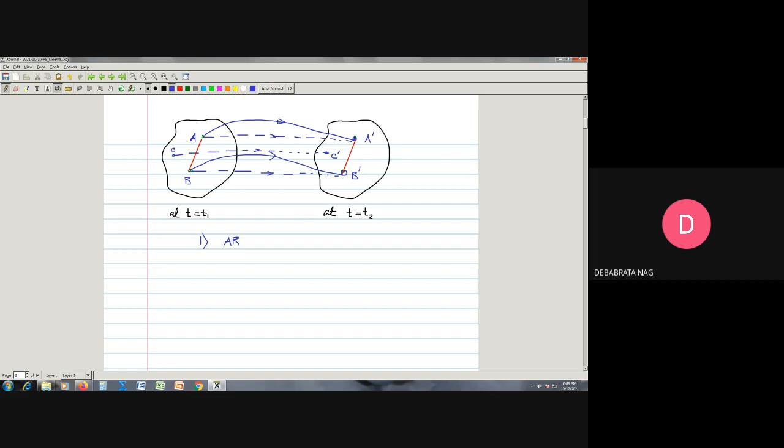So it means when it comes to this position at time t equal to t2, the distance between A and B is remaining the same. That is number one. In case of translational motion, what is further important is that since this body does not change its orientation, this line AB and this line A dash B dash are going to be parallel to each other. So first, we need to understand that the distance between the 2 points AB is going to be equal to the distance between the 2 points A dash and B dash at time t equal to t1 and at time t equal to t2.

That is number one. This is from the rigidity definition of the body. We can say this is the rigidity definition, that since the body is rigid, the distance between any 2 constituent particles is going to be constant. So that is number one.

And number two, since it is a case of translational motion, we find that the orientation of the body is unaltered. Since that orientation is unaltered, we note that AB is going to be parallel to A dash B dash.

So in this part, it is independent of the fact whether the rigid body is executing a curvilinear translational motion or a rectilinear translational motion. That means in case of translational motion, the distance between these 2 lines, if we join these 2 particles, any arbitrary particles defining the boundary of the rigid body, we will find them to be parallel to each other like this.

So we see that this is an illustration of the translational motion of a rigid body. Going back to our discussion, this is the simplest type of geometry to study its kinematics, and it is sufficient to follow the motion of a single point belonging to the body, as the motion of all other remaining points will be identical for all the particles in the body. Here, the orientation of the body also remains the same, as we have already illustrated. So that is what is termed as the translational motion of a rigid body.

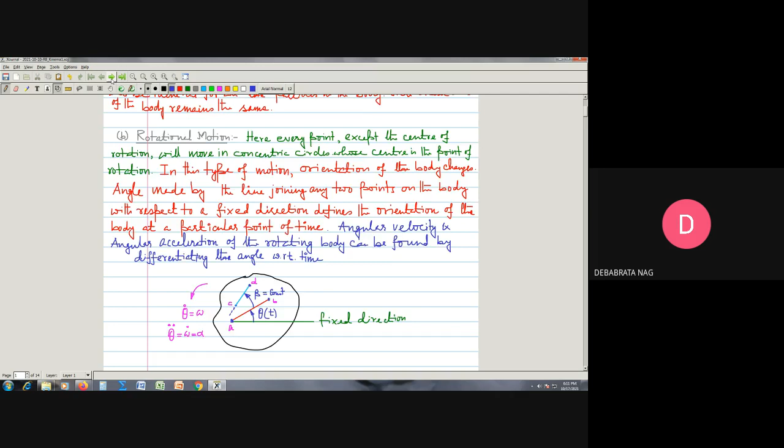So if we see in case of rotational motion, let us go to the illustration once again. Say for example, if we consider that same old rigid body here, let us consider this is the rigid body, and let us suppose that this point, suppose this is point A, is considered to be the center of rotation of this body. So what it means is that only this point is undergoing pure rotation. The rigid body is rotating with respect to point A, undergoing pure rotational motion with respect to point A. That defines that out of all the points, only this point A, considered to be the center of rotation, is the only point which is inertially fixed.

That means if we consider again, say this is the position at time t equal to t1, and after time t equal to t2, we have this body once again. Let us place it here like this, and then we slowly begin to rotate the body in this manner. This rotation may not be able to be displayed clearly with this diagram, so let me just take it this way. So this is the body, suppose.

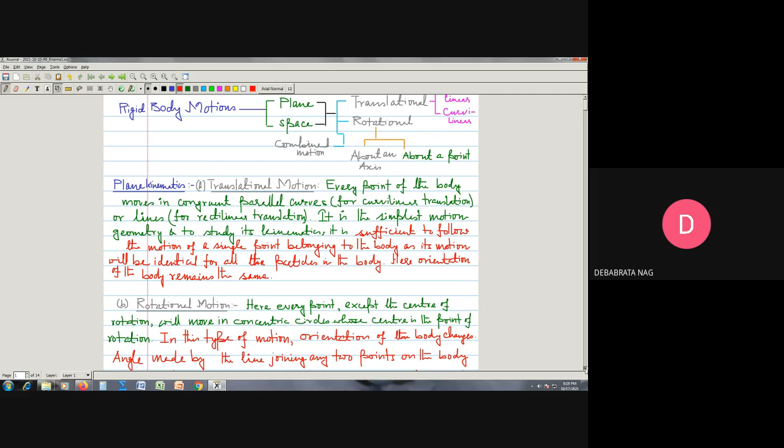So you see this angle will also be equal to theta. This is actually going to be the characteristic of rotation. So we can say the angle CAC dash is also going to be equal to theta, and it is going to be true for all other points on the body. This angle defines our actual amount of rotation, expressed in either degrees or radians. So we note that every point except the center of rotation will move in concentric circles whose center is the point of rotation.

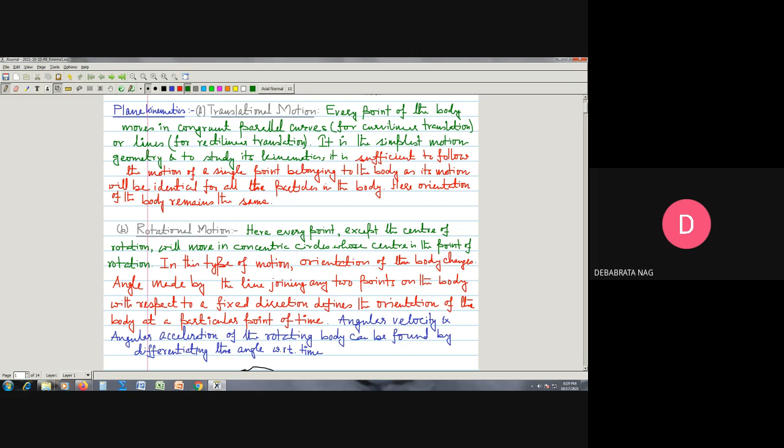In this type of motion, the orientation of the body changes, as we note that the line segment AB and the line segment AB dash are differently oriented in the plane. So we note that the orientation of the body is going to be changed, not preserved, unlike in translational motion. In rotational motion, the orientation of the body changes, and the angle made by the line joining any two points on the body with respect to a fixed direction defines the orientation of the body at a particular point in time.

Suppose this is a rigid body, and we take two points on the body, A and B. Through point A, if we consider a fixed direction, say this horizontal line taken as our reference, we can join the two points by a line segment and consider this angle as theta. This angle theta will define the orientation of the body at a particular point of time.

Why is that? Because after time t equal to t1, suppose this body is rotating with respect to point A. We will now show how such rotation can be depicted in the figure, so it is being rotated.

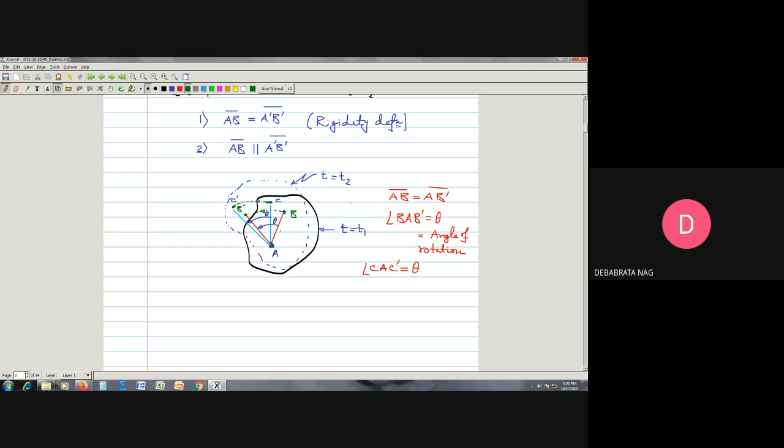Suppose this is our fixed line. The initial orientation of the entire rigid body can be defined by the angle which the line segment AB makes with this fixed direction. This direction does not change at any point during the course of motion.

If we call this angle phi, then phi defines the initial orientation of the body. If theta is the amount of rotation of that same line segment after time t equal to t2, then phi is the orientation of the body at time t equal to t1.

If theta is the amount of rotation, then at time t equal to t2 the new orientation of the body will be the angle made by the same line with that same fixed direction. This will be equal to the initial orientation plus the angle of rotation, if the two angles are in the same direction.

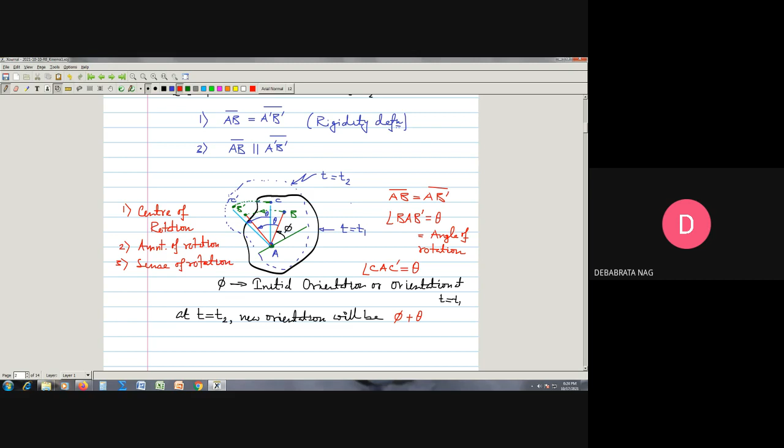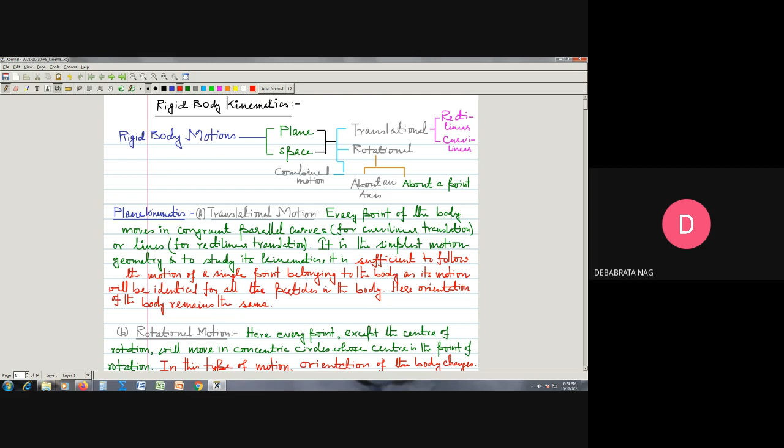When we say sense, in plane rotational geometry this can be clockwise or counterclockwise, anti-clockwise. We need to define all three things before studying the plane rotational motion of a rigid body. All these motions are pure, meaning there is no other component other than the rotation of the body.

Now consider another two particles, C and D. Here angle theta is defining our orientation. Taking the same fixed line, suppose the angle between line segment AB and CD is beta. From the definition of rigidity of the body, the angle between these two different segments is going to be unaltered, because it is a rigid body, this angle between two different points on the body remains unchanged.

Consider this angle as beta, which is constant. As far as the line segment AB is concerned, its orientation can be considered as a function of time, written as theta of t. Considering angle beta, which is also constant, the angle made by line segment CD with the fixed direction will be theta of t plus beta.

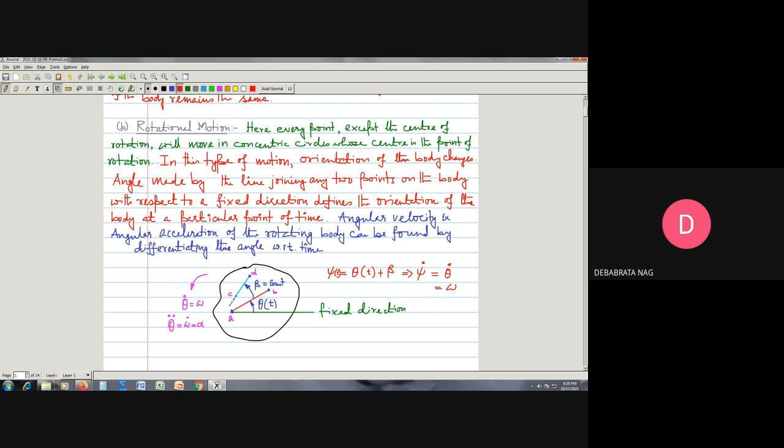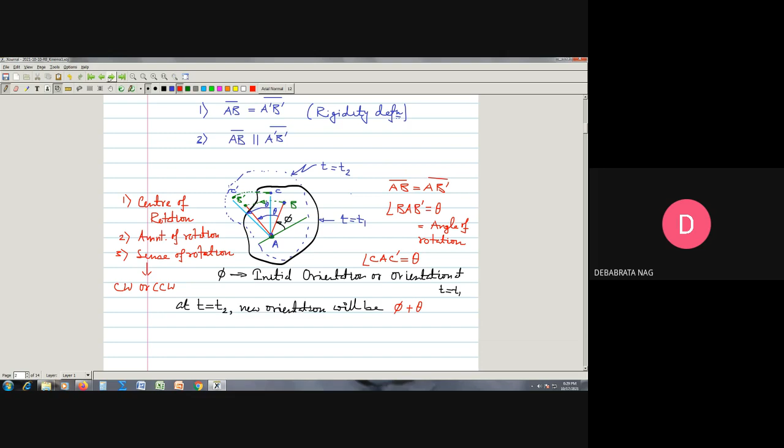The rotation is taking place about point A, the center of rotation, which is the first thing we need to define. With this center of rotation comes the concept of the axis of rotation. The axis of rotation is an imaginary straight line passing through point A and perpendicular to the plane of the body.

If we imagine a hypothetical line coming out from or going into the plane of the screen through point A, that line is considered the axis of rotation. In case of plane rotational motion, this type of rotation is termed fixed axis rotation.

We call this rotational motion fixed axis rotation because during the course of the motion, this axis, always passing through point A and remaining perpendicular to the plane of the body, does not change its own orientation. If it points vertical, it remains vertical throughout, always along a fixed direction. That's why this plane rotation is termed fixed axis rotation.

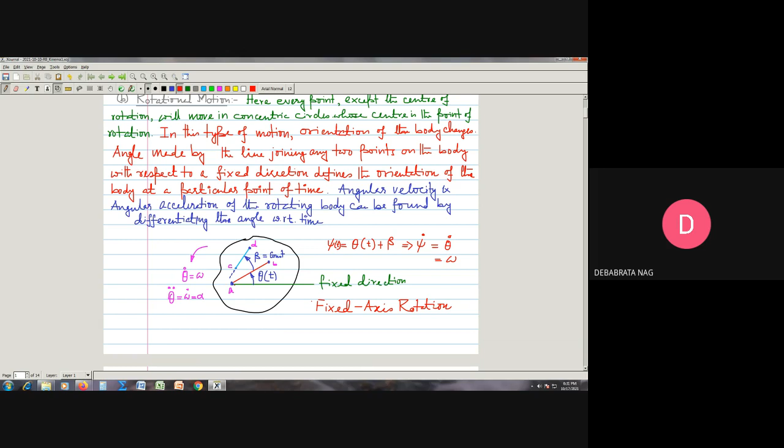Having defined the first two types, translational motion and rotational motion, it's now time to introduce the case of combined motion, which in this case is termed plane motion.

Simplistically put, general plane motion is a combined motion having both pure translation and rotational motion. We can understand it by considering a rigid body. At time t equal to t1, and after some time at t equal to t2, suppose this is the new geometry of the body. If we carefully look, we find that the orientation of the body changes, and at the same time there is some translational component.

Let's take two points belonging to this body, A and B. At time t equal to t1 they are here, but when the body occupies this new geometry at time t equal to t2, suppose point A moves to location A prime and point B goes to position B prime.

If I join these two line segments AB and A dash B dash, from the definition of rigidity, the AB line segment and the A dash B dash line segment are going to be equal. Second, we note that AB is not parallel to A dash B dash, indicating that there is some change in orientation of the body.

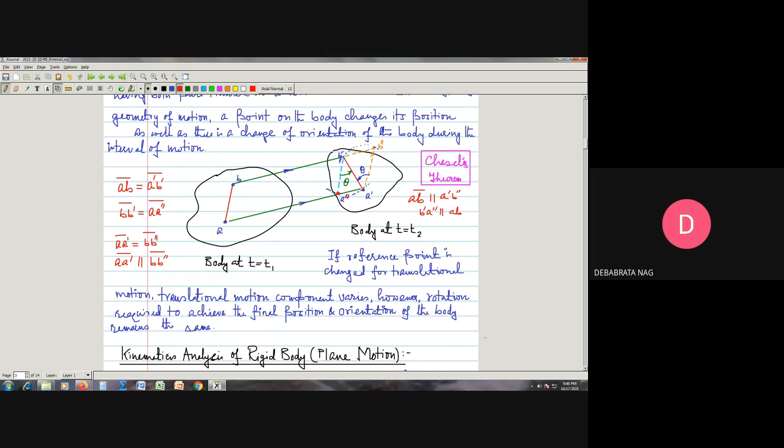Having discussed the three types of plane motion of a rigid body - pure translational motion, pure rotational motion, and the combination of these two as plane motion - we are now going to study the kinematical analysis of this rigid body. So far what we have discussed is the geometry of rigid body motion. Plane motion of a rigid body can be a translational motion, whether rectilinear or curvilinear translation, it can be a pure rotational motion, or it can be a combination of translational and rotational motion.

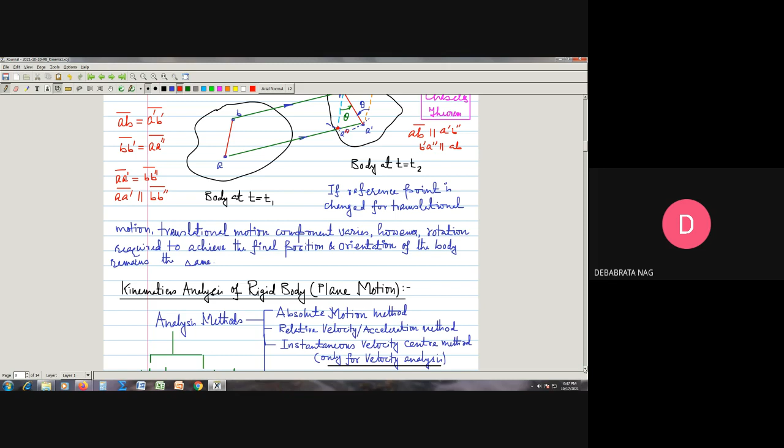Now, once we have discussed the geometry of the motion, let us try to understand the methodologies of analyzing such motion, which is known as the kinematical analysis of rigid body motion, which is the plane motion. In this case, we can classify the analysis methods for finding out the velocity as well as the acceleration.

The analysis methods can be of many types. Firstly, the absolute motion analysis method, by which we can analyze velocity and acceleration of a body. Then we can apply the concept of relative velocity and relative acceleration to study the kinematics. Then we can have the vector analysis method, and we can have the concept of instantaneous center of velocity method. However, this particular method is only applicable for velocity analysis, although in the other methods we take care of both velocity and acceleration.

So except for this instantaneous center of velocity method, all the other methods can simultaneously and completely analyze velocity and acceleration of a rigid body. However, the instantaneous center of velocity method will only be applicable for finding the velocity of a point on the body. We will illustrate every method one by one, but not exactly in the order mentioned here - the order can vary, and we will start with the absolute motion method as our first methodology.

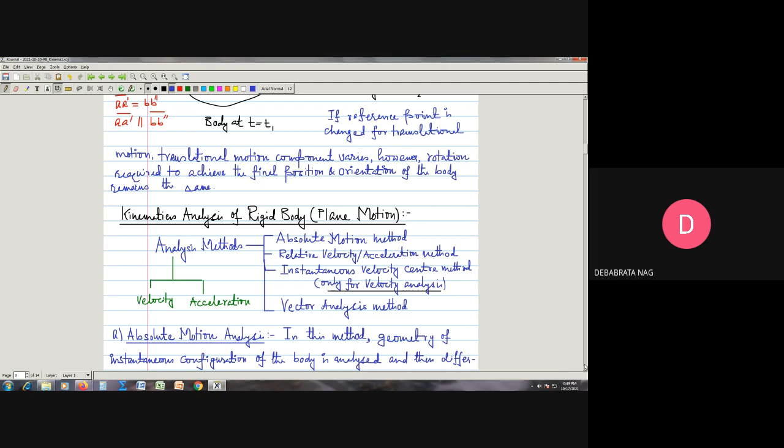However, for the remaining methods we may not follow the order in which the methods have been listed here. So we begin now with the absolute motion analysis method.

In this method, basically what we are going to do is analyze the geometry of the instantaneous configuration of the rigid body or a system of rigid bodies. We may have a single rigid body or interconnected rigid bodies, which we call an assembly of rigid bodies. This is important because an assembly of rigid bodies often leads to the concept of mechanisms. Mechanisms are nothing but assemblies of several rigid bodies where motion is modified and transmitted from one point to another without any transmission of force.

So in case of a mechanism, we simply consider the modification or transmission of motion from one point to another point of the system. That assembly of several rigid bodies can be assembled to perform this kind of transmission or modification of motion.

By modification of motion, what we mean is that sometimes a machine must convert rotational motion to rectilinear motion or vice versa. This is called modification of motion, and it can also be motion transmission.

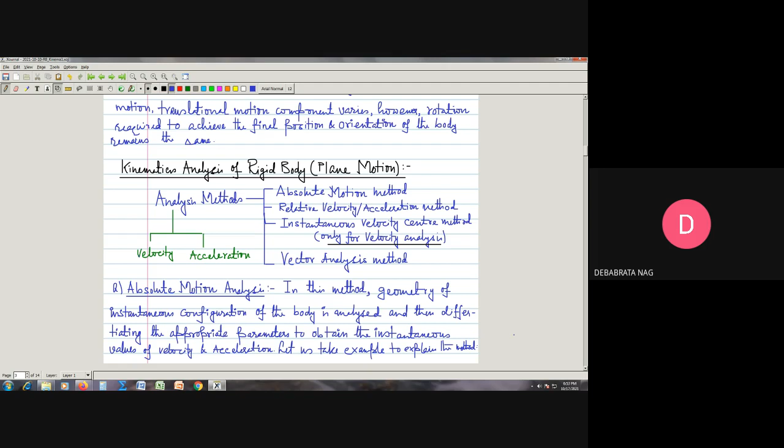So it is better at this point, further elaborating the concept in words and sentences, to take a concrete example to illustrate the basic inherent concept of absolute motion analysis. In doing this, let us take an example from the book of Meriam and Kraige, and we will take a few examples here to illustrate the basic concept of the absolute motion method, following and explaining the different steps used.

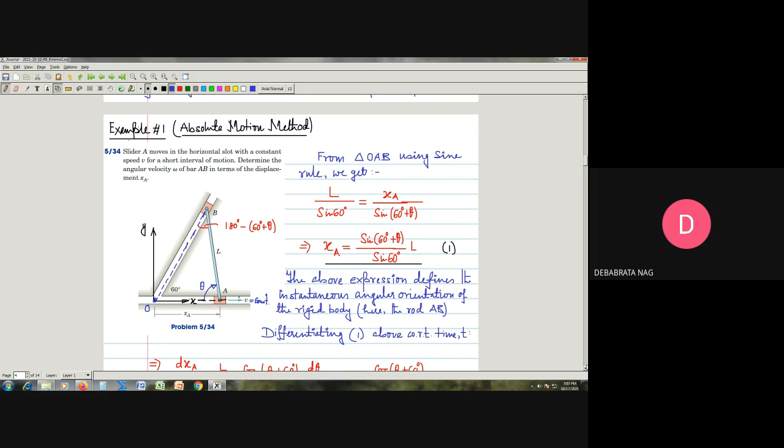Proceeding that way, if we differentiate, we get dXA/dt equals L by sine 60 degree, since this is constant, times cos of theta plus 60 degree, times d theta/dt.

Since theta is a time-varying angle, we say d theta/dt, as per our concept, is theta dot, and this is the angular velocity of this rod AB.

So d theta/dt is theta dot, which is omega AB. With L sine 60 there, it becomes L omega AB times cos of theta plus 60 degree, divided by sine 60 degree.

We know dXA/dt is V, given for us, so we can simplify it algebraically. Since our objective is to find the angular velocity of this rod, we write omega AB equal to V by L into sine 60 degree by cos of theta plus 60 degree.

Sine 60 degree is root 3 by 2, so we simply write root 3 by 2 into V by L into 1 by cos of 60 degree plus theta.

Now, our objective is to express this angular velocity in terms of XA. We are half done since we've introduced the geometric parameter theta, but we need to eliminate it because we must express all our answers in terms of XA.

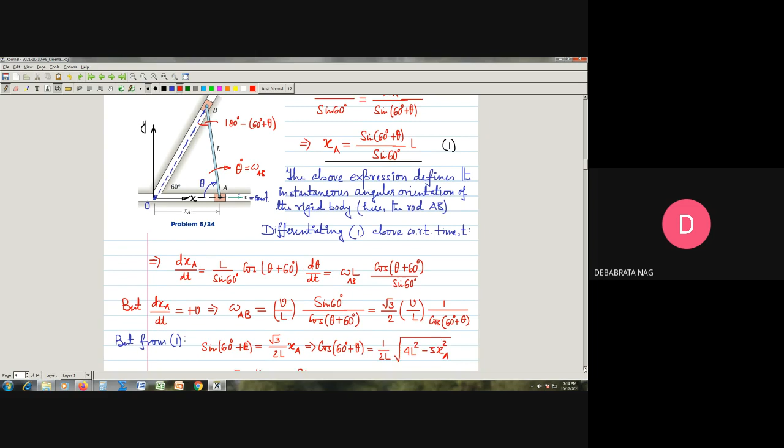Once we identify them, it is a straightforward process of differentiation. You need to differentiate once for finding the velocities, and for finding acceleration we need to differentiate once again. In the process, you may need to do some algebraic simplification, the way we have done it here. I hope that with this example you have understood the basic concept of absolute motion analysis.

So let us further reinforce our concept by taking another example. This one is a little bit more complicated. The earlier problem that we showed was consisting of a single rigid body. Now here we have a collection, or a system, of rigid bodies. So let's take this problem.

The piston rod of the hydraulic cylinder, this is the piston rod and this is the hydraulic cylinder, gives point B. Point B is on this lever, ABC, considered to be a rigid body. The lever is of equal length, and point B is the midpoint of the lever ABC. You can call this a lever, or in engineering sense it is called a rocker arm.

So at point B, the middle point of this rocker arm, the piston rod of the hydraulic cylinder is attached. This piston rod can be moved either direction, it can be pushed or pulled, meaning it can extend or shorten its length. Thereby it gives motion to this member.

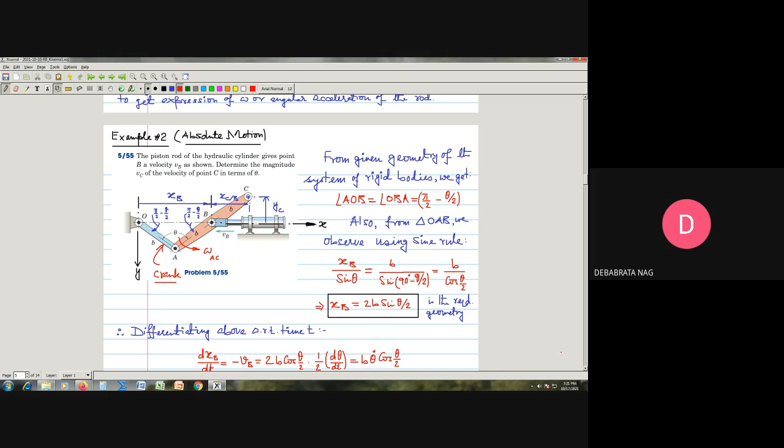This minus sign significance needs to be understood very clearly. So we can say dxb dt equal to minus Vb, and differentiation continues like that. On differentiation, we can say that it is b theta dot into cos theta by 2.

So for this link ABC, omega AC, if we want to find out the angular velocity of this entire link, we need to know that the angular velocity of this link is going to be the differentiation of this entire angle pi by 2 minus theta by 2, correct?

So if we differentiate, we see that it becomes omega AC. That means if we take this angle pi by 2 minus theta by 2, then obviously omega AC can be written as, from this simple geometry, it is pretty clear that omega AC is nothing but d/dt of pi by 2 minus theta by 2. So that is going to be my omega AC, which will of course be equal to minus theta dot by 2.

So minus theta dot by 2, keeping in mind that theta dot is given by this expression, the minus sign will get absorbed, and ultimately we can say b theta dot cos theta by 2, from this equation, can be written to be equal to minus Vb. So if someone is also interested to find out what will be the angular velocity of this link ABC, we will have to use this equation to define our terms. So we see therefore that b theta dot cos theta by 2 is equal to minus Vb from this equation. We define this as equation 1.

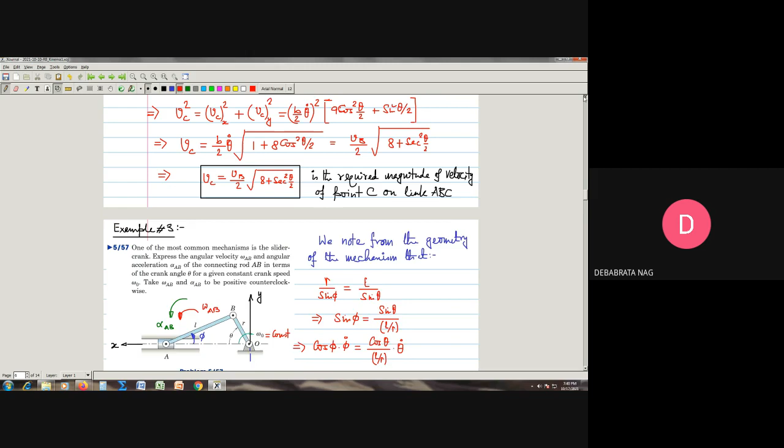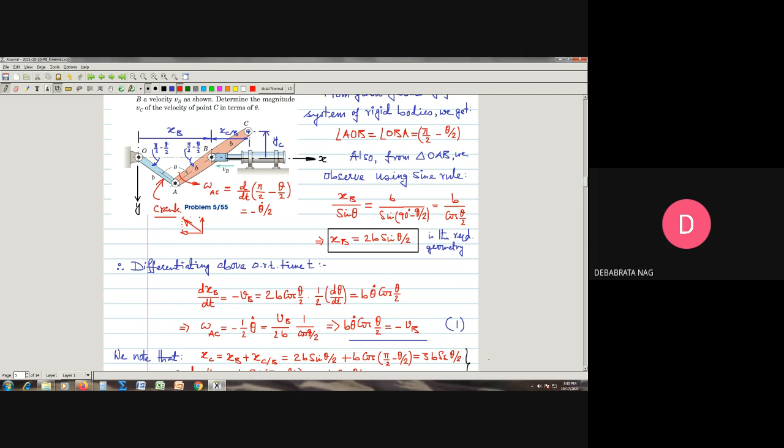It is clear from the above three examples that absolute motion analysis is a little difficult, because the underlying difficulty is to analyze the given geometry, and in some cases simple mechanisms also lead to complicated geometrical equations. So barring a few examples, absolute motion analysis is not economically advantageous. We need to consider more efficient alternative methods, particularly as the mechanism and geometry become complicated and the equations become more elaborate and clumsy.

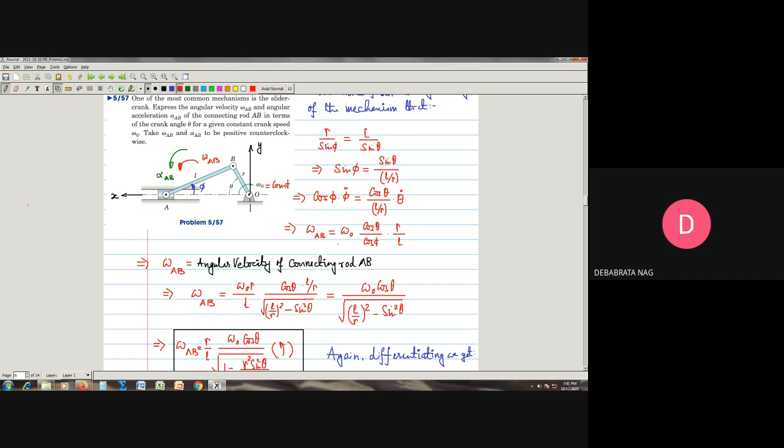More elaborate algebraic simplification and manipulation needs to be done, keeping in mind the load of differentiation. All these things will motivate us to explore different methods, and we will continue to do that in our subsequent classes when we take up the study of kinematics with other methods.